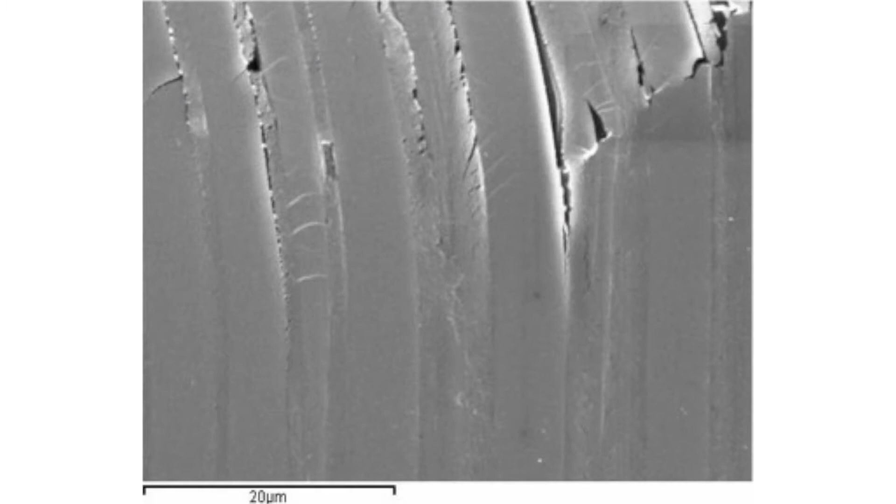Failure in composite materials is particularly challenging. This is due to two factors: the breadth of different failure modes that composites exhibit, and the very small scale at which they occur compared to the scale of typical composite structures.

The implication in terms of numerical modeling is that we need to somehow represent and predict failure events that occur at a scale we typically cannot afford to represent explicitly.

We have developed physically based failure models for different failure modes in composites, namely matrix cracking, fiber kinking, and fiber tensile failure. One challenge in validating failure models is that while they may work well for the cases they were developed for, it is considerably more difficult for them to be robust and give accurate predictions for a breadth of generic situations.

For this reason, the scientific community organized benchmark failure exercises whereby selected researchers were asked to provide blind predictions for a comprehensive range of failure scenarios for which they have experimental results. The fact that the predictions are blind and that the range of scenarios analyzed is broad are key to providing a meaningful validation against experimental results and comparison between theories.

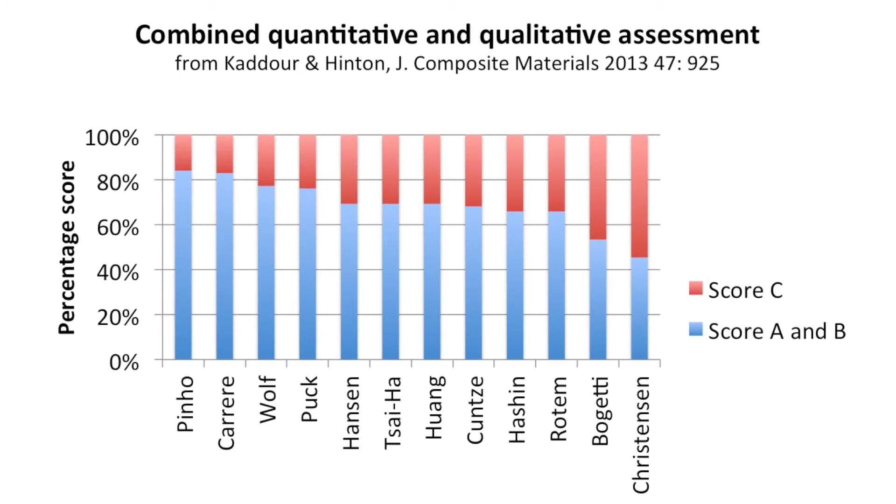We used our failure models in the second worldwide failure exercise, which focused on generic three-dimensional loading cases, and they were ranked first in both the quantitative and qualitative rankings.

Matrix cracking is a typical failure mode in fibre-reinforced composites, and it does not always lead to ultimate failure of composite structures. To understand the effect of matrix cracks in a structure, it is important to determine not only when in the loading history they occur, but also what orientation these cracks have.

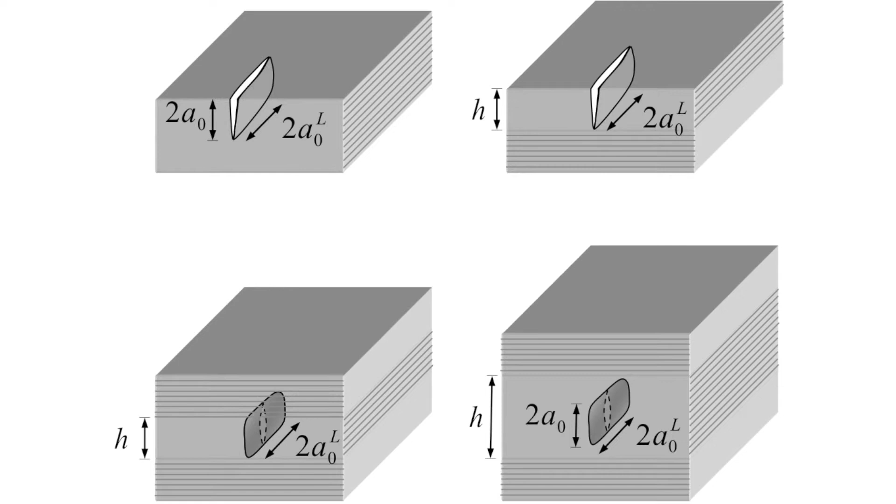Our main contribution in this field has been to modify and extend the NASA Langley Research Center matrix failure criterion to 3 dimensions, and to incorporate the effect of nonlinear constitutive response in the in-plane in-situ strength effect.

Fiber kinking is a failure mode characteristic of longitudinal compression, whereby tiny matrix cracks lead to a loss of support for the fibers. This leads to a localized nonlinear deformation of the fibers, eventually involving buckling.

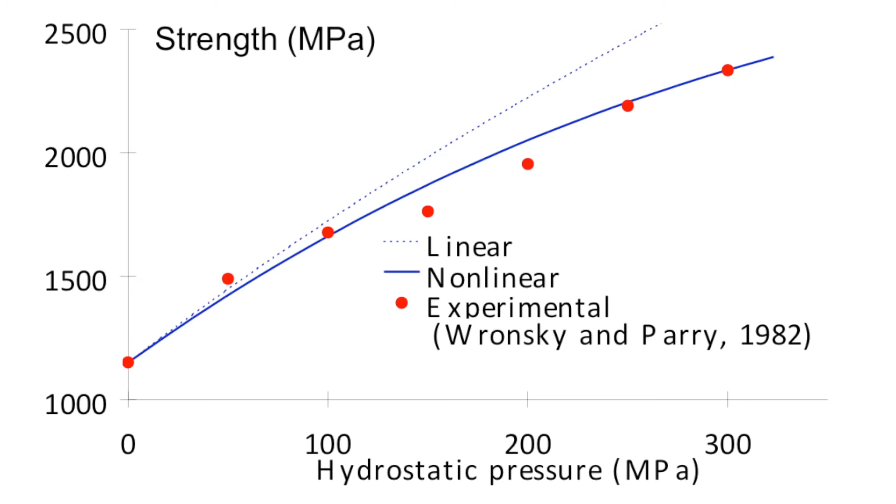Our main contributions in this field have been to modify and extend the NASA Langley Research Center fiber kinking failure criterion to 3 dimensions, to incorporate the effect of nonlinear constitutive response in the fiber kinking failure mode, to obtain original experimental information on the sequence of failure events leading to fiber kinking, and to provide detailed analytical physically based models for the formation of kink bands.

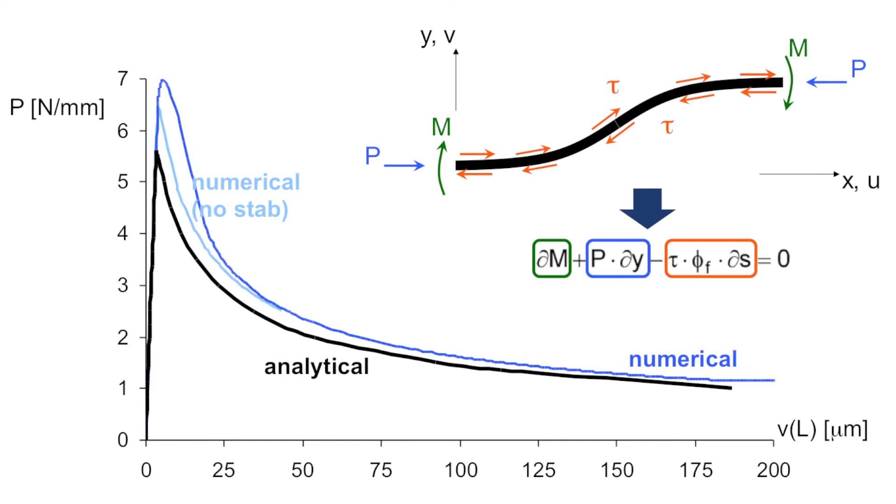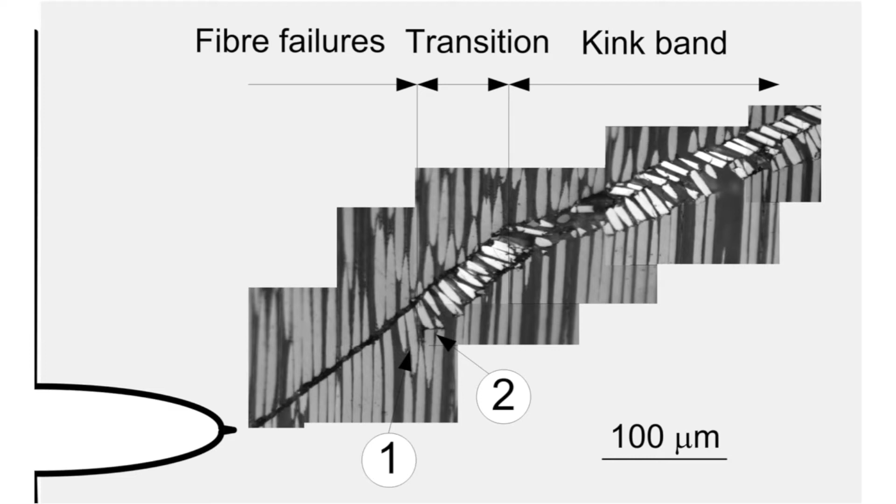We also obtained experimental evidence of a separate physical process, shear failure of the fibers, which then leads to the formation of kink bands, and finally proposed shear failure of the fibers during longitudinal compression as a possible explanation for certain characteristics of experimentally obtained failure envelopes.

The physical processes that lead to the fiber tensile failure mode in laminated composites are perhaps the most complex. While failure of individual fibers does not imply ultimate failure of the structure, individual fiber breaks accumulate in small clusters, and when these clusters reach a critical size, ultimate failure does occur and is typically catastrophic.

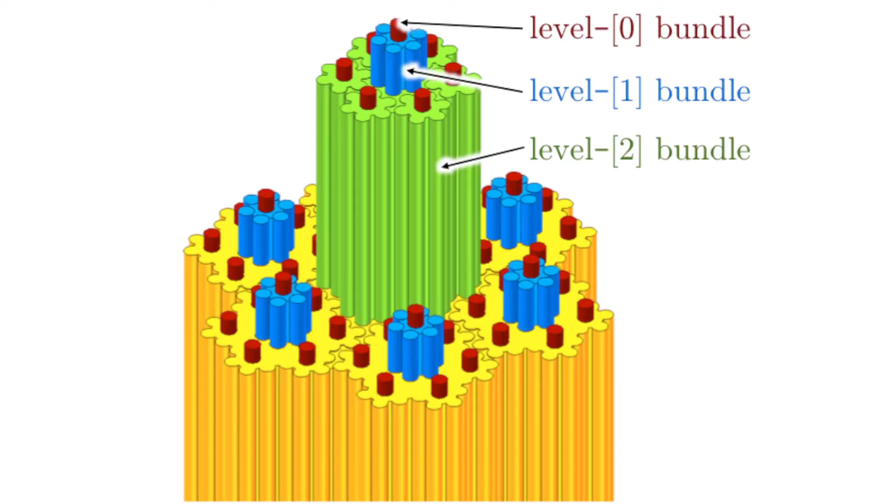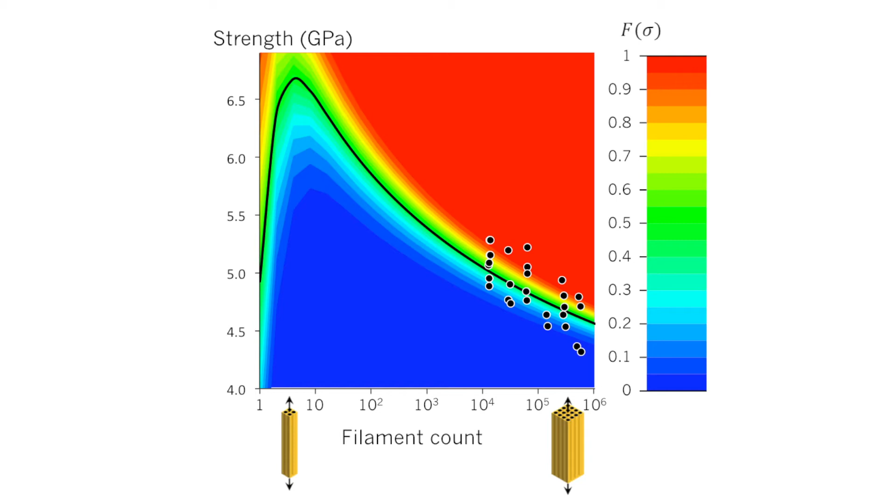Our main contribution in this field has been to develop the first analytical hierarchical model for the fiber tensile failure mode. This model idealizes the composite hierarchically: bundles of fibers composed of subbundles, which in turn are composed of subbundles. Starting with the stochastic strength distribution for each fiber and the load transfer mechanism between fibers and bundles, the model recursively predicts the strength distribution for larger and larger bundles of fibers.

Laminated composites can fail when the individual lamina, that is the plies, debond from each other. This is known as delamination. Predicting the growth of delaminations has received considerable attention in the literature.

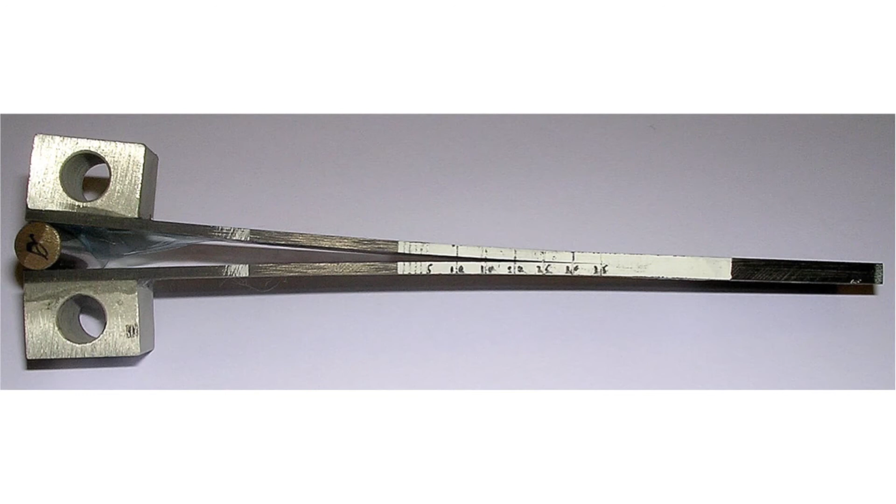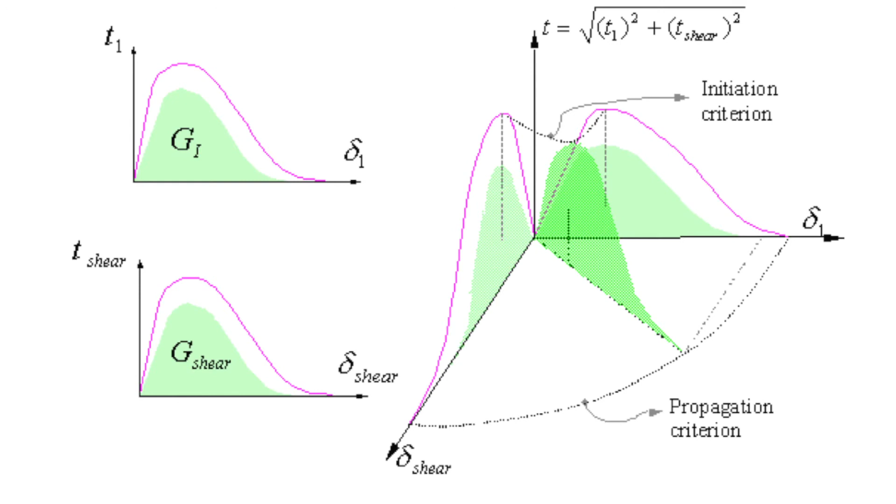Our main contributions in this field have been to incorporate nonlinear geometric behavior into an existing finite element model, to implement one of the first cohesive elements in an explicit finite element code, to investigate the effect of discontinuities in the cohesive law on stability, and to investigate the interaction between delamination and matrix cracking.

In many practical applications, composite structures are applied in environments with considerable superposed hydrostatic pressure. Aircraft fuselage and pressure vessels are trivial examples, but complex geometries can themselves induce a triaxial stress state with non-negligible hydrostatic component. Our main contribution in this field has been to develop a computational model which includes the effect of hydrostatic pressure in the constitutive response.

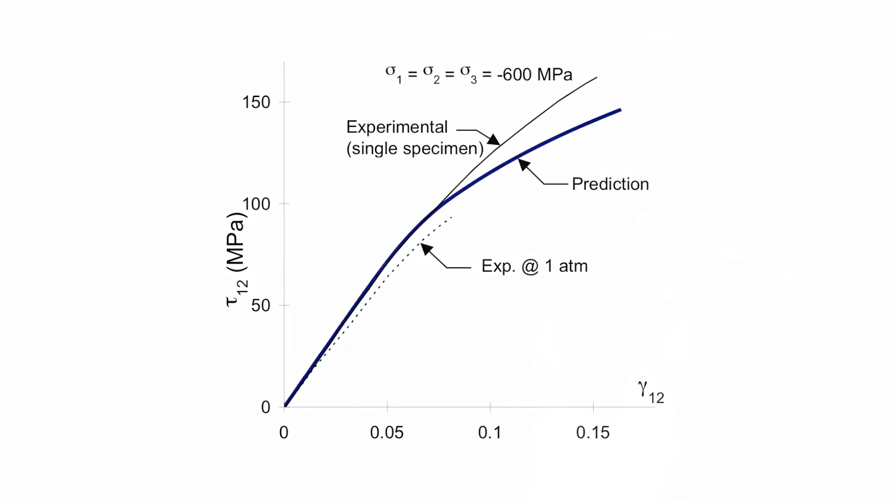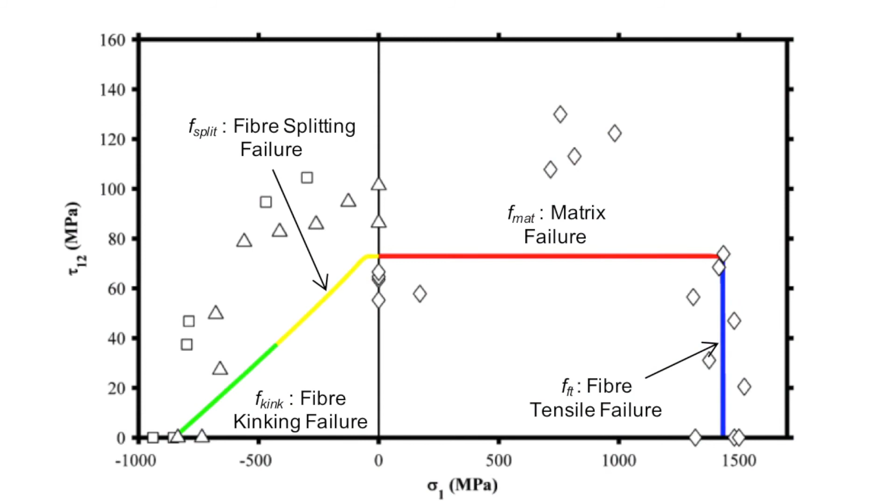While most failure models in the literature are deterministic, the uncertainty associated with material properties as well as loading conditions typically leads in experiments to a stochastic response.

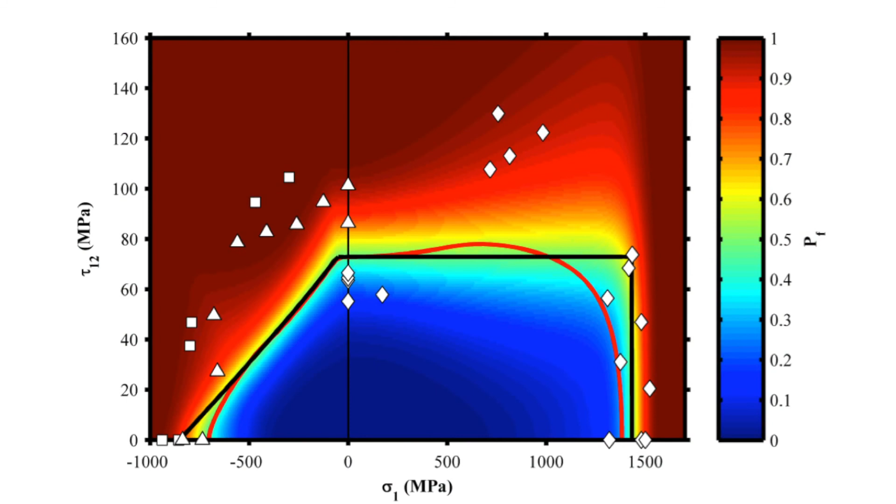Our main contributions in stochastic failure models have been to use Monte Carlo simulations to predict stochastic failure envelopes, to apportion the variability verified experimentally to corresponding material properties and loading conditions, and, as mentioned before, to develop an analytical stochastic strength model for the fiber tensile failure mode.

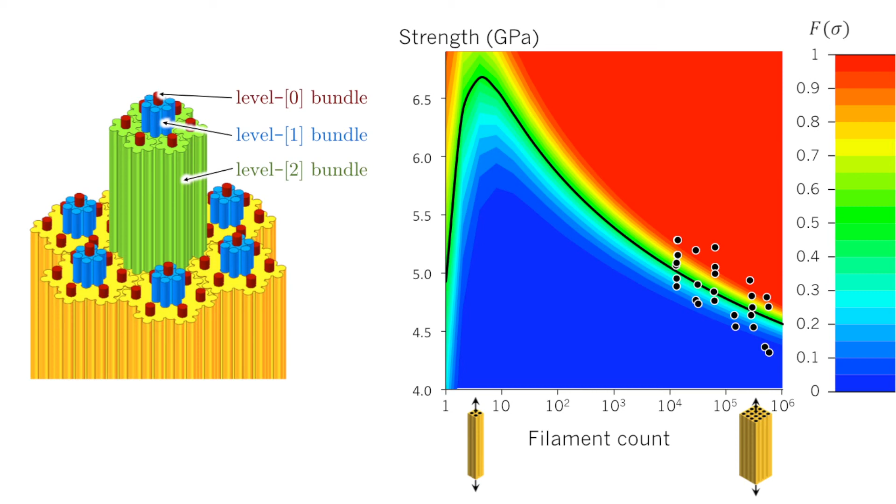In woven composites, the weave structure leads to a combination of failure modes taking place and evolving before failure of the entire tow and structure occurs. We have used our experience with failure models for unidirectional plies to analyze woven composites.

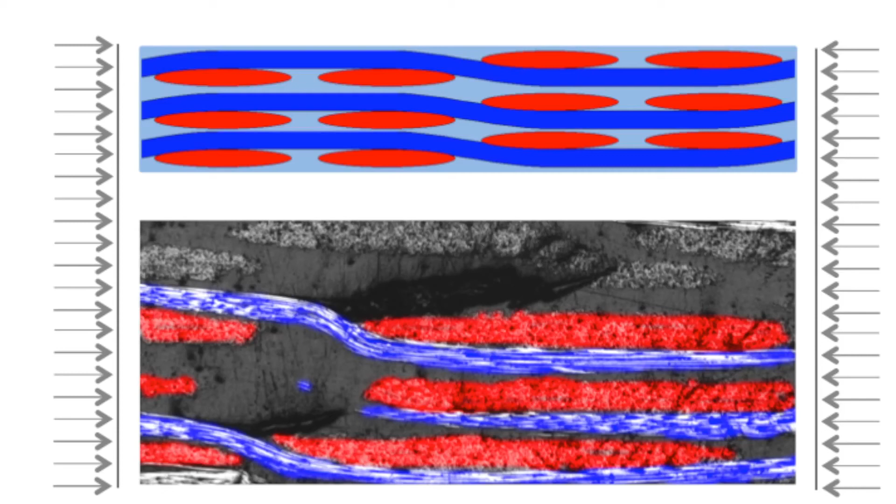Our main contributions in this field have been to obtain original experimental information on the sequence of failure events leading to compressive failure of woven composites, to develop an analytical model for failure of 2x2 twill woven composites under compression, to develop periodic boundary conditions which exploit symmetries in the weave, permitting computationally more efficient numerical models for woven composites, and finally to obtain numerically failure envelopes for woven composites, both deterministic and stochastic, with the latter obtained using Monte Carlo simulations.